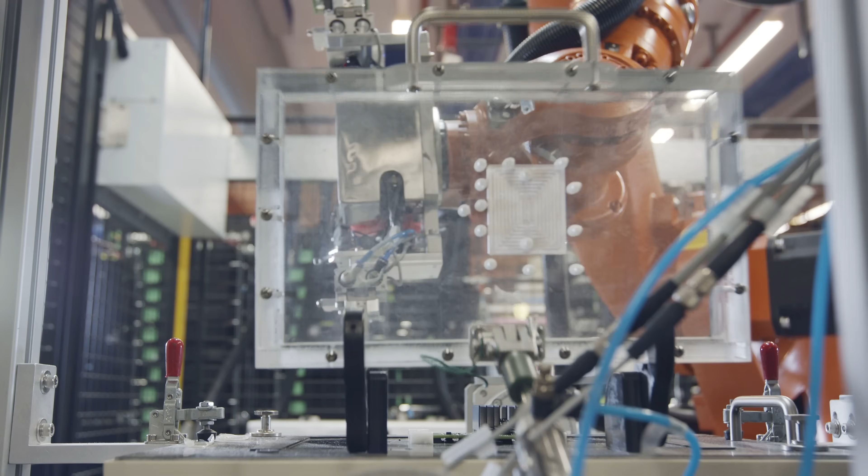Certainly we can add things to the robot to allow it to sense its environment. We can have force sensors in the gripper so that it knows how much it's squeezing, and we can set limits so that it doesn't squeeze beyond a certain point. We can add springs or any elastic components that allow it to give and be compliant if it needs to be compliant. We can add LiDAR so that it can map out the room and know a little bit more about where obstacles are, even if it doesn't know what the obstacle is.

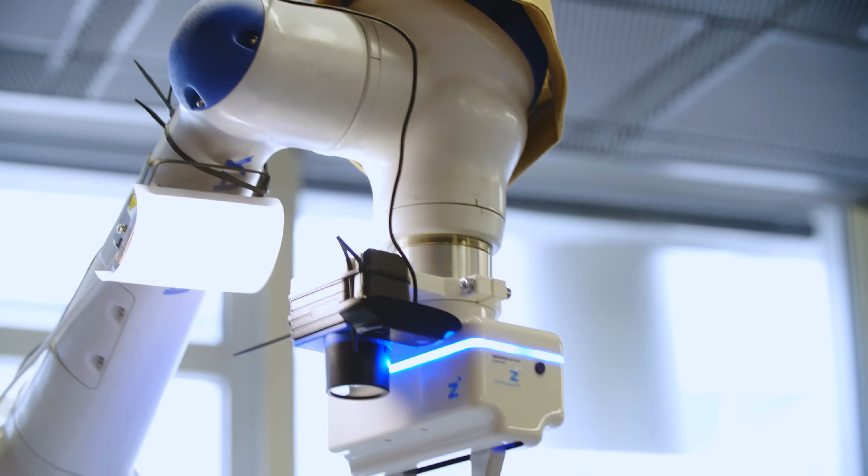Or we can add a camera so that it can use software to track objects if they're moving, or detect what an object is, or even detect the orientation of an object so that we can know what way to pick it up. All of these things add a huge amount of complexity and cost. They also give you more places for things to fail. Maybe it looks at a block and accidentally thinks it's a banana, or a sensor fails and it doesn't detect something that it should detect, and so on. So as you add more components, you are also adding complexity and cost.

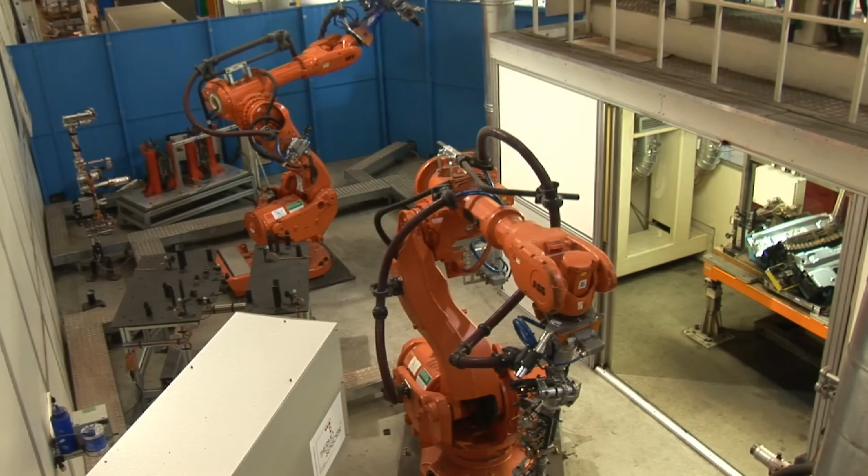Ideally, the simpler the task for the robot, the better. Although we can do much more advanced things with robots. So we need to figure out as much as we can in advance about the various conditions the robot will be operating in, and then we program all that into the robot at the beginning so that it can do its job over and over again. Generally speaking, the less variation there is, the better for robots, that is.

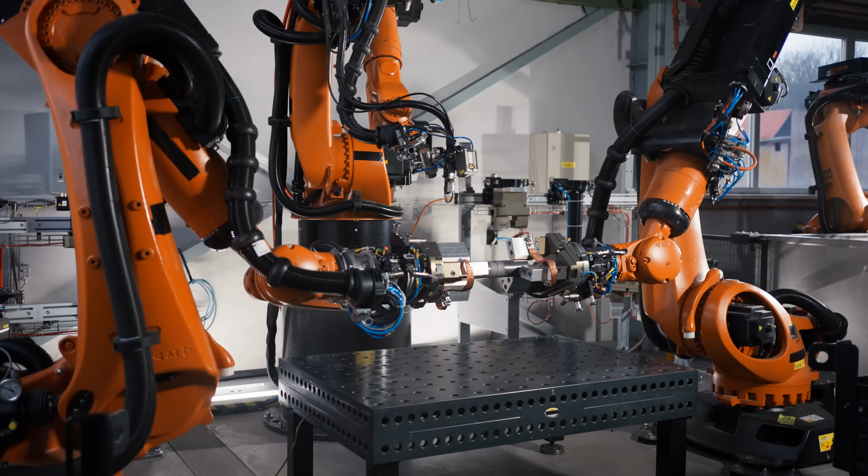Now, once you've mastered one robot and you've taught it how to do its individual job, now you need to teach that same robot how to cooperate with the robots around it. I mean, they need to be able to hand things to each other. They need to be able to wait for each other until the following robot finishes its task so that it can take on the next task, and so on. This thing scales into a really interesting snowball of complicated tasks that need to be done. Now that you've got that really basic introduction to robotics, we're gonna head into this lab where they prototype all sorts of industrial applications with 6 robots all collaborating together.

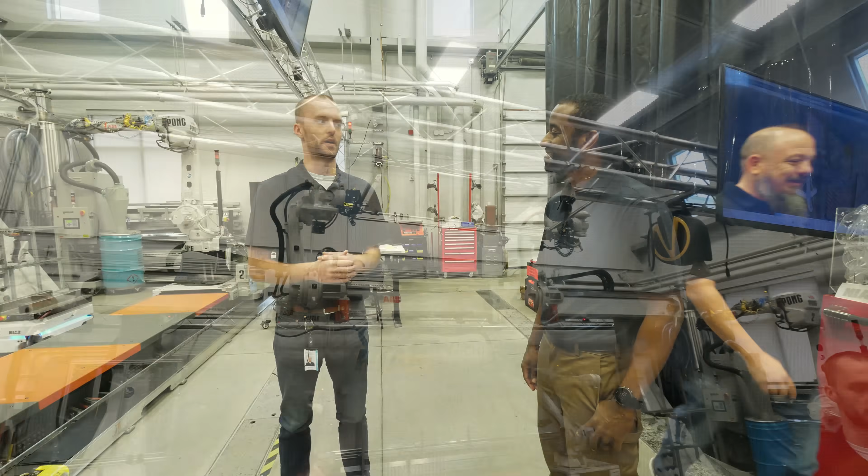This is the Robotics and Automation Lab here at WSU and NIAR. We roughly have around 15 full-time staff members and close to 35 to 40 students that work for us. And actually most of our workload is done by the students, and it's kind of overseen by engineers. I'm actually a business management degree myself, so I do a little bit more on the business side, but I help a lot of the engineers understand the business processes that go through the whole process of integrating a robotic cell into an industry.

Go ahead, if you want to click that button right behind you, actually I'll get it real quick.

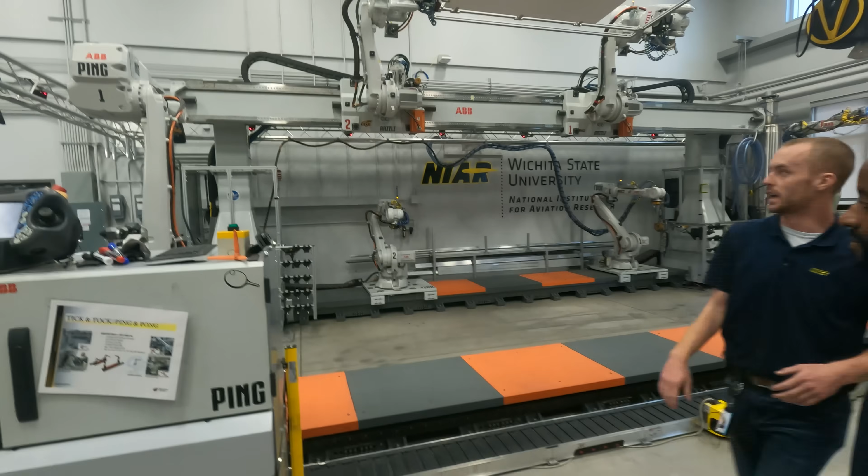And so this is what we call MRAM. It is our multi-robotic advanced manufacturing cell here at NIAR. A little bit of a mouthful, that's why we call it MRAM. But one of the things we do in this cell is a lot of prototyping and a lot of research and development purposes. This isn't something you would see at a customer site. They don't really need 6 robots on 3 different tracks that all share information with each other. But for us, it's really neat. So we're able to test a lot of different inner workings and be able to determine how things work together.

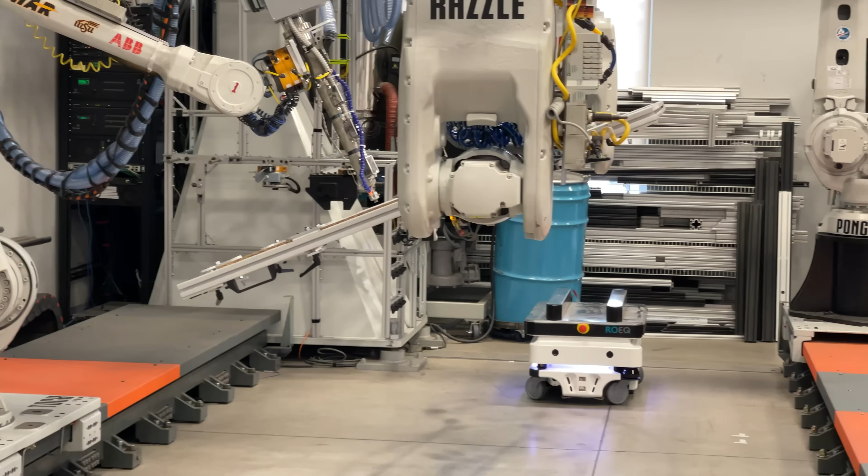We've actually been able to move panes of glass with these robots. Glass is very rigid. Any kind of different tension on different angles generally creates cracks, stresses, and things like that. These robots do it pretty smoothly without any issues, so it's kind of neat. This demo here actually would normally put a suction cup on this MDF board, and then we would, in a sense, run wire harness through it. Over here, we've even attached a large 3D print head, so we are able to do bigger print volumes than what a regular 3D printer would do. Yeah, that is giant, man. Yeah, it's very large.

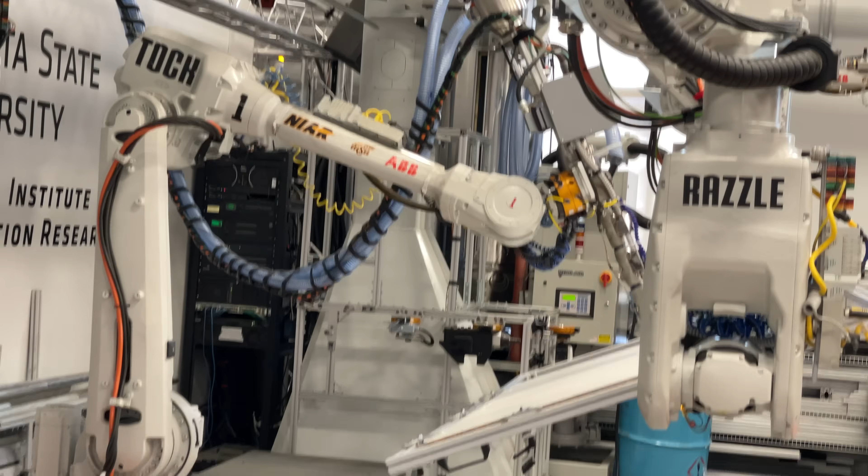It's not something we use very often, but it is one of those things that we like to highlight, the capabilities. Generally, if there is a product on the shelf, say like a drill, 3D printer, anything like that, what we do a lot of is we buy that product, we study it in some way, we disassemble it, and then we try to attach it to a robot. We've done everything from drilling to robotic inspection to pick and place.

Some of the more recent ones that we've been doing are pick and place, but with some more difficult materials to pick up, like bags of protein. Okay. Or we've actually picked up radiators more recently too. That's a little bit difficult because you can't really bend the radiator fins. So trying to pick them up in a specific way is kind of a fun, challenging little engineering process for us. It was funny because we had the radiators lined all the way across here, just big stacks of them. But yeah, we did this in this cell initially.

Okay, I want to talk about this radiator problem for just a minute because I love solving problems, and so when I hear a hard problem, I get really excited. Now, of course, we don't know all the conditions, and if we could figure this out in a few minutes, we wouldn't be doing this in a research lab, right? So we need to pick our radiator up. There's a couple things. First, we want to make sure it's positioned in such a way that the robot can grab it the same way every time.

Also, we can't just use a regular gripper because if you squeeze it too hard, you're definitely gonna bend those fins. They're so fragile, so easy to damage. Certainly we don't want this to happen before it comes out of the box, right? We want the customer to receive a radiator in pristine condition. So how do we get that? If you don't squeeze it hard enough, it's gonna slide out of your gripper. You can't use vacuum or suction because the fins allow air to get in and you're never gonna be able to pull a vacuum.

And that's why research facilities like this exist, because they can see what happens if you add a feedback loop, something that's measuring how much force is being applied. Maybe you can get it dialed in just right to lift it perfectly every time. Maybe you need an entirely custom-made gripper that works well in all the different scenarios, or you need a combination of the two where you've got feedback and a custom gripper. Solving these kinds of problems is huge for mass production, right? If you want a robot to be able to work 24 hours a day and pick it up consistently, correctly, without damaging your product over and over again, you need to solve these kinds of problems. And that's what I love about what they're doing here.

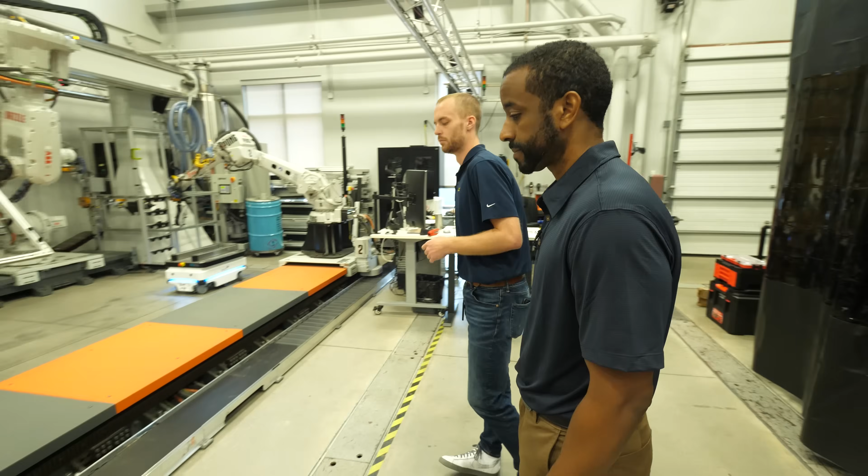Generally what happens is we will purchase all the parts for the customer. We'll get everything in, the robots, if we need fencing, especially in industry, industrial robots generally need to be safer, so fenced in is one of the big things. For us in the prototyping world, we use LiDAR scanners and these sensors. So as I get closer, I'll eventually stop the robot. Yeah. So much easier for us to enter and exit the cell without having fences, lockout, tag out.

I'd like to talk a little bit more about your proximity sensors and safety devices. Is this a sufficient option for going industrial without caging? Can you talk a little bit more about how this system works, what its limitations are, things like that? Yeah. So I would not say that this in itself is sufficient enough, especially in a production environment. Okay. If you're doing research and development, you're getting to where it could be more sufficient. We like to use these along with something called light gates.

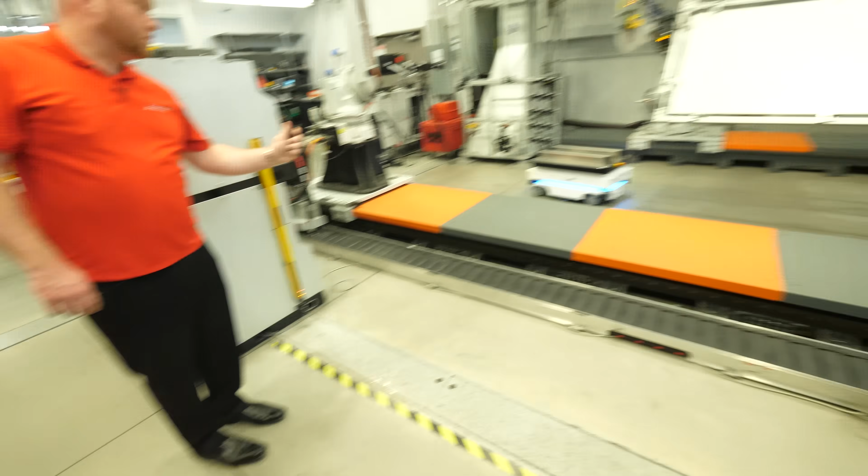Okay, I didn't see the light gate there. Actually, that one's turned off because we have this one on and we enter and exit the cell. We like to really highlight how this works. And where's the other end of that? Okay, I see it over there. It's on the fence right there. That actually helps us use a faux wall. So we use those a lot, but one of the things it doesn't really tell you is if there's something already in the cell when the cell starts. But lockout, tag out, we've done in the past. A light gate is very much like those sensors that most people disable in their garage.

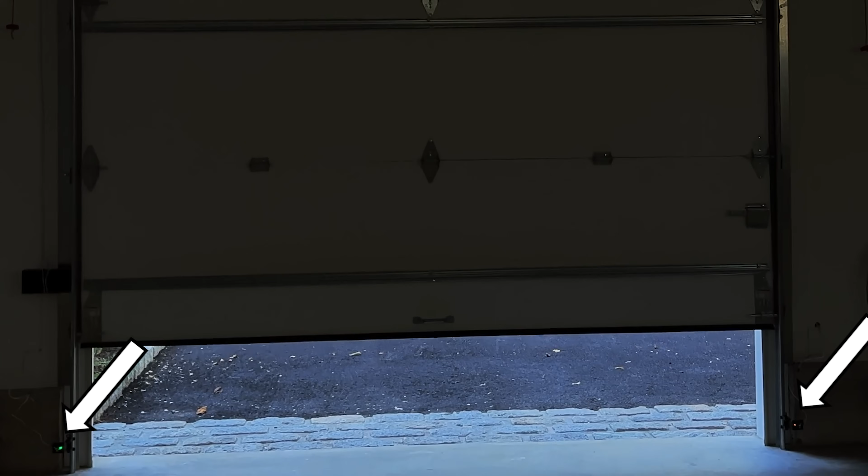When you walk into your garage, you break the beam and the garage door stops, except this is a whole column, so you can't just step over it. Anybody passing through this light gate will trigger the system, which should make all of the robots stop moving as you come into the cell. But as he mentioned, once you're on the other side of the light gate, the beams are continuous again. So then you would go to a more robust system like lockout, tag out, which is what he was describing.

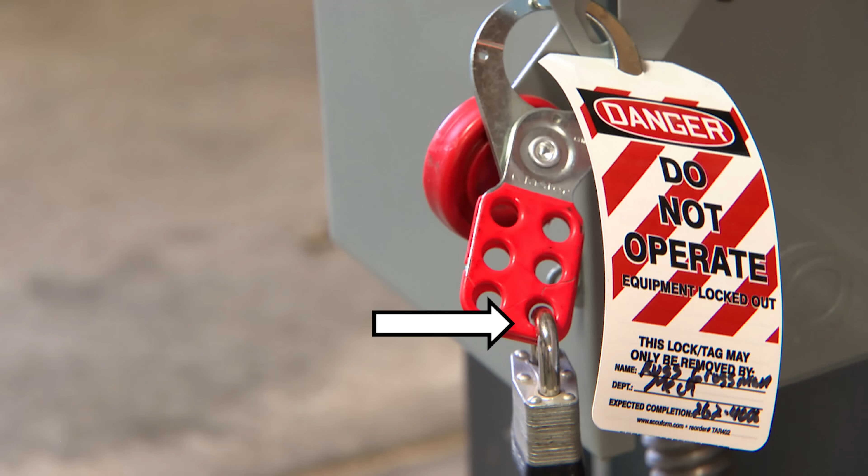And all that means is the physical switch that allows the machine to be turned on is in the off position and locked in the off position. So there'll be a tag here that says, don't turn this machine back on, and it'll be physically locked. The person who's working inside the cell will have to come out, and then they're the ones who are supposed to remove the lock. That's the way it should happen, thus making the system much safer for humans to work around.

We work with a lot of industrial robots. Some of the other types of robots are this MiR over here, the autonomous mobile robot. We use these a lot for ever-changing environments. Generally, they're a little bit different than what you would see at your regular Amazon packing facility, where they follow tape on the floor, reflectors on the ceiling, or anything of that nature. These use the same LiDAR sensors that are actually in these sensors here to map their environment and then path based on that mapping.

Generally at manufacturing plants or something like that, they have a walkway for people and potentially a walkway for robots, if they have mobile robots. These don't necessarily need that. They're able to move around that map they've created and path through different objects. If you have people that are bringing pallets of parts in, they're able to actually move around that and not be held up by anything. So pretty neat situation there.

So one of the big things is safety, especially in robotics. These industrial robots are meant to do a job and be very repeatable and not be stopped even if you enter or exit the cell. They're going to go right through you. Luckily, that has never happened here. We were very safe. But one of the things is that customers will come to us and be like, hey, this is something that we need an operator in that cell to work on. Generally, we will advise them not to use an industrial robot if that is the case, because safety.

So what robots we then advise to use is collaborative robots. A lot of the collaborative robots actually have force sensors built into all their joints. So if they swing around real quickly and they bump into you, it may hurt, but it's not going to go right through you like an industrial robot will. It'll actually stop based on that force sensor. You're then able to start it up later.

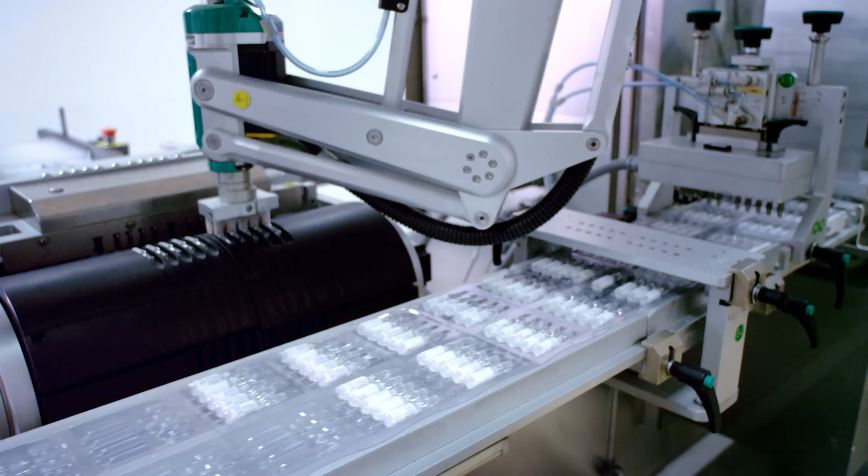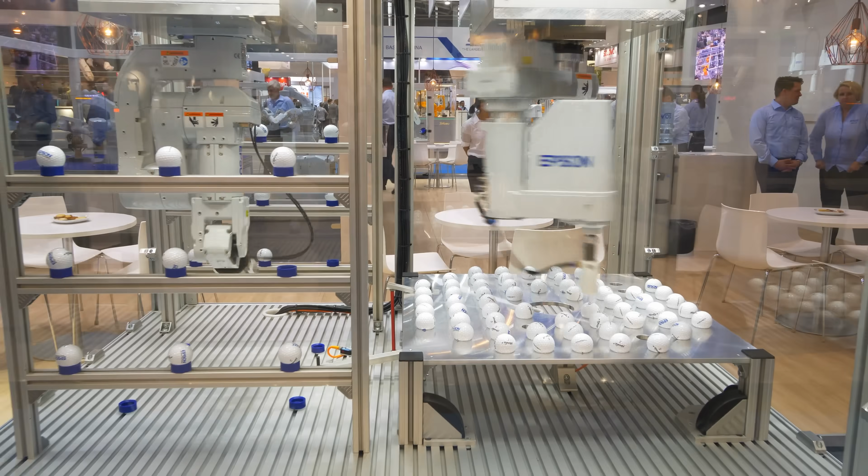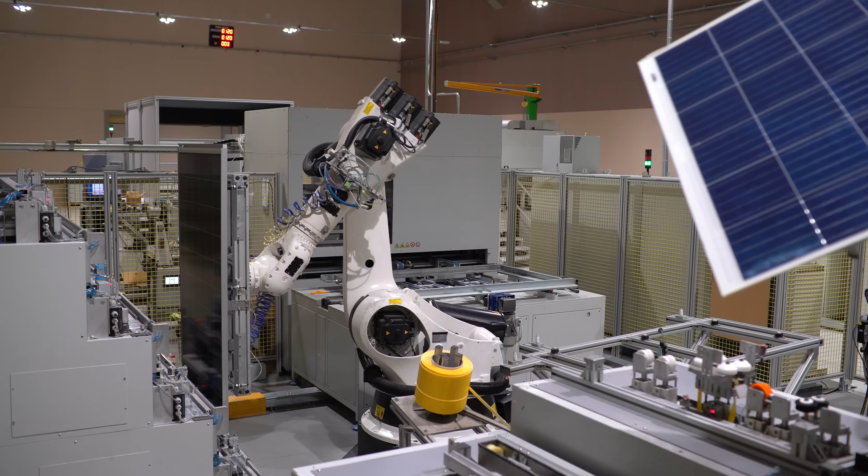If you want to move 1,000 parts an hour, you can make a robot move 1,000 parts an hour, but that robot moves so fast. If you have a human in the way, it cannot stop in time to prevent injuring the human. And if you want a robot strong enough to lift a car over and over again, any force sensors or any compliance that you add to that robot have to be robust enough to not be triggered by the car itself, which means that a human, when it gets in the way of that robot, is never going to trigger that sensor. And so there's always a trade-off. You have to give up something.

Generally, you are giving up both speed and power or lifting capacity when you switch to a collaborative robot, among other things. But that's why you might go industrial versus collaborative.

And that's how we come back to what he said in the interview, which is if they really want to have a human working next to this robot, then we're going to have to switch over to collaborative. But what he didn't say is when you switch to collaborative, you are usually significantly lowering the capacity of the robot to go fast, as well as how much load the robot can handle.

Now, at this stage of the interview, we found out we were actually supposed to be meeting with the SAE team at this time. We got our times mixed up. So we left this room and came back and continued to interview with another person. So we're going to pick up with Matt Tomlin as we talk more about this robotic cell.

So my name is Matt Tomlin. I am the director of ARC, which stands for Automation Research Center here at NIAR. And what this lab is, really the best way I like to think about it is as industrial R&D. Meaning I can take anything from that reverse engineering side, all the way up from a napkin sketch, up to a production level machine that operates at 3 shifts a day, almost lights out.

Yeah. The cell behind me called MRAM, Multi-Robotic Advanced Manufacturing Cell, is designed to be able to take any tool that I would like to see on a robot or see in an automated cell, and I can put it on any of these robots behind me and be able to simulate an environment as close as possible to what one of their full cells would look like.

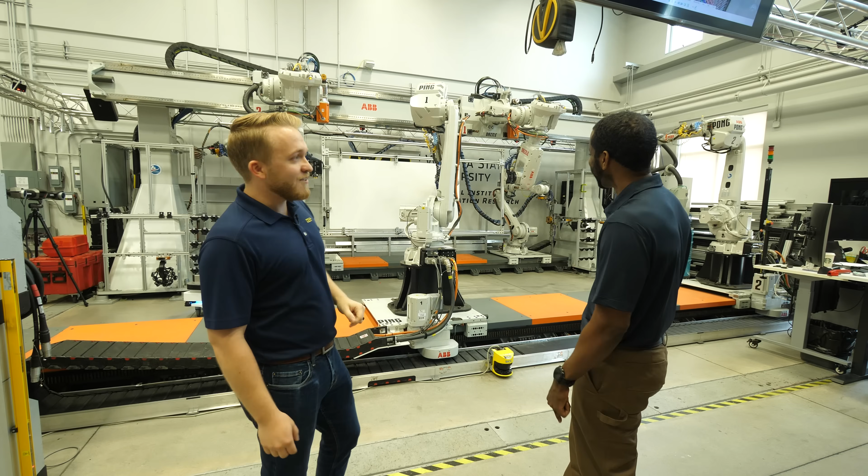Okay. Right now they do it on tables, they do it on maybe 45-degree stands or sometimes boards that sit at about 90 degrees. Yep. Here for me, I mounted it on 2 robots that are hanging off the rail on the top, right? Yeah. It's so overkill. But what it allows me to do is I can rapidly build that in-house in about a day. I can stick it on the robot and then I can tell you what it's going to lay up like at a 90 degree, at a 45 degree, at a 0 degree. So you can see all sorts of different variations.

But having it on those 2 robots allows me to be super flexible with it. And especially when I build a tool that does the wire laying, I can see how it operates at different reachabilities for the robot to see if we have accuracy issues. But areas or examples like that are the reason that we use the more complex cell, even though it might be a little bit overkill.

Now, I thought this was really interesting because normally in a production environment, you wouldn't use 6 robots because you could just build fixtures for the things that aren't moving around and the robot can just interact with the fixture. That would be significantly more cost efficient and again, reduce the number of parts that are wearing out, and so on. But in their case, they're rapidly changing the scenarios all the time.

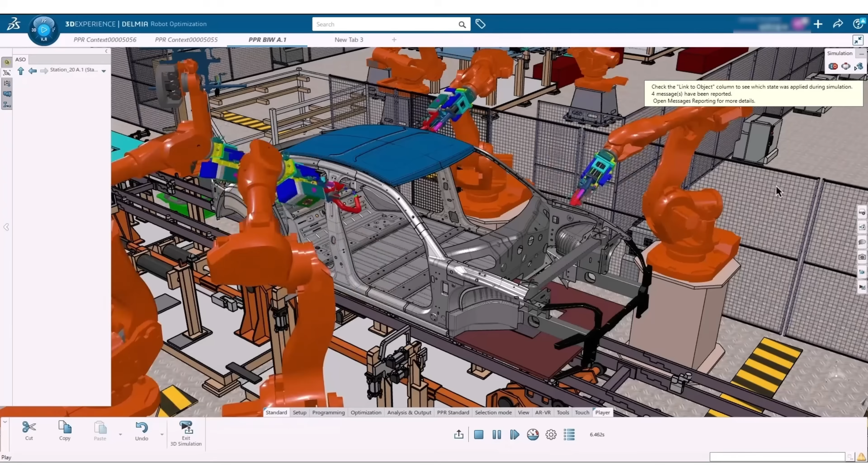And so they're using Delmia to quickly program the robots to get whatever the temporary fixture is into the right spot, and then they can interact with that. And if they don't like the position, they can quickly change the position of the fixture from 90 degrees to 45 to flat, as the example that he gave. That's phenomenal, I agree. It's overkill in a production environment, but it makes perfect sense in an environment where you want to rapidly test out multiple ideas.

You can set it up very quickly, as he described, within a day in Delmia, and then you come over to your robotic cell and actually do it for real with real robots. Now you've confirmed your results from Delmia in the real world, and then you can go about building fixtures to do this type of setup in a production environment.

When you say wire laying, we're talking about you might have a panel that's got, I don't know, 50 or 100 or 300 wires on it, and then the robot will pull the wire out. What happens? Is it also stripping the wires as well? Actually, so let's take a look at the tool right back here.

So this is one of our very quick prototype tools, right? At the very initial stage, to even test the concept. Is the concept even going to work? So we built this literally in the matter of a couple of weeks. Had the idea, designed it all in 3D, in a 3D environment, so specifically for us, 3DE. When it came down to it, we designed all the different pieces here.

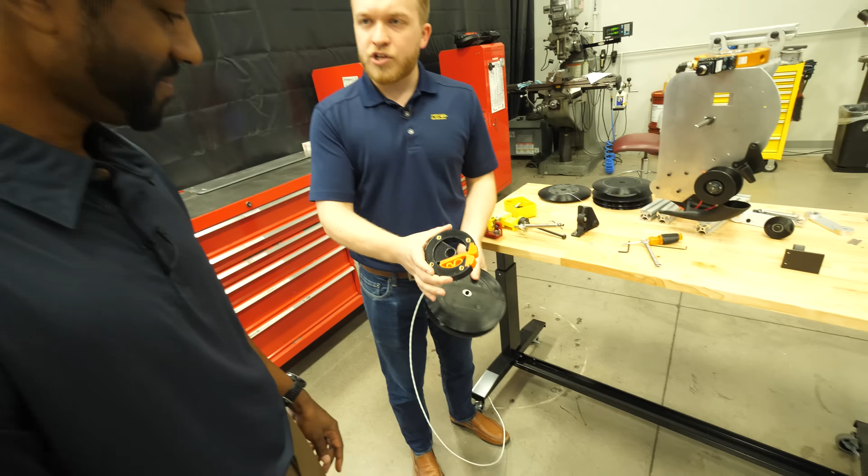So like the spool would be one of them. Yeah. So I'd have a spool of wire. And the way this works is on the inside of the spool, I have this little, almost like a holder, if you will. And the way this is designed is so that I can take a piece of machinery, which is just over here, that actually cuts, strips, and labels all of my wire.

I can shove it directly into the spool, but as it's pushed in, it holds it while it's in the spool, but as soon as it needs to come out, the tension's built just right to where it just pulls straight out of the spool and goes directly onto the board, allowing the robot to come back over, shove the wire in, and then start spinning this to spool up whatever it needs to spool. So that part is fully automated then? It is fully automated, which again is the concept that they were really going for here.

But now, as we look at getting production level ready machines, the big part of this is I can only do one wire at a time. And when I'm talking wire harness boards, I'm talking a lot per hour, per day. They need numbers at the end of the day. And so what can I do to speed this up? It's actually where we're looking at, like, AFP machines are a great example. So that's automated fiber placement machines.

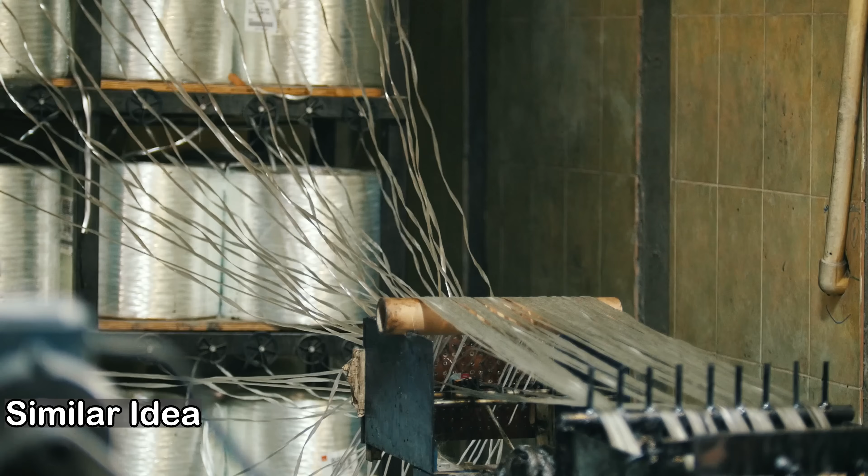They have a lot of technology out there that takes tows of these composite fibers. And by tows, I mean just like simple spools. There's 8 spools on one head usually, or maybe you can get up to 16. And they all flow through the center and actually come out to where they are laying up and making a tool. That's actually how a lot of aircraft are made now.

Wow. But can I take that same idea now and introduce it for our wire harness tool? To where now I feed in 8 different wires, or maybe 16 different wires, have it all feed through the end of the tool and then lay it directly up onto the board. That's where we're talking numbers and sheer speed coming out of the cell, to where I'm producing maybe a full harness in an hour.

And that's what I love about engineering, because you're constantly thinking about new ways to solve a problem. And when we first walked over here, in my mind, I was thinking, all right, so you have the quick change tool on the top, and this could be set up for one wire, and then you'd have another one, and then another one. But if you could spool all the wires in advance together and then take the whole thing and put it in, that's unbelievable.

And that's what's nice too about working with so many different industries, is we use some aerospace and defense tech to be able to actually translate that concept out to other industries like automotive, for example. And so we get to bring a whole new light and whole new eyes to industries that haven't seen it before. Yeah, that's fantastic. So yeah, absolutely everything we do goes through a couple different design phases.

So I have my concept design, I have my detailed design, and I have my final design phase. And that's all before I ever even build a full cell. But what I can do, and what we do here in the lab, is design all this stuff inside 3DE, whether it's part design, assembly design, whatever it might be.

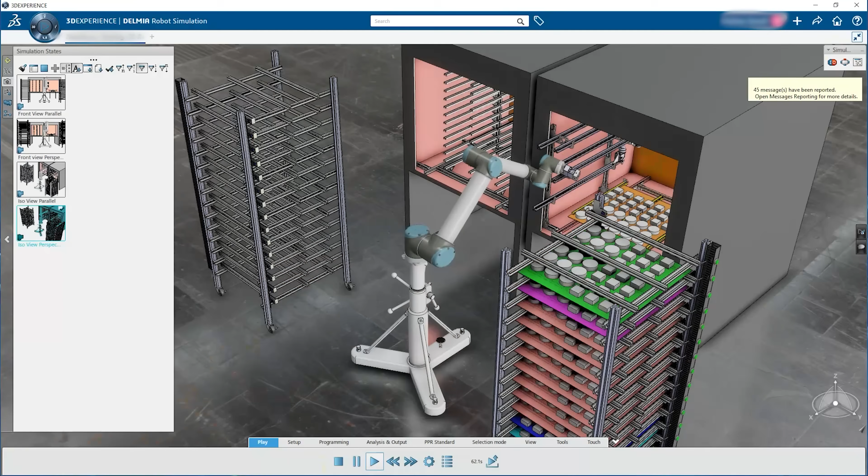I go through all my kinematic simulations just on a base level, like if my spool needs to rotate here, something needs to open and close, great. But then I can take those kinematic models and I can translate them straight onto the robot using DELMIA. And that's a lot of what you see up here on the screen, is we've developed these individual tools.

And so yes, you can see it picking and placing. Yes, you see some dry racks, you might see some other bits of automation, but the robot's also sitting there driving absolutely everything. So as I pick up and drop, I can see what that looks like. I can see how much time it takes. And so then I can actually start to produce some metrics.

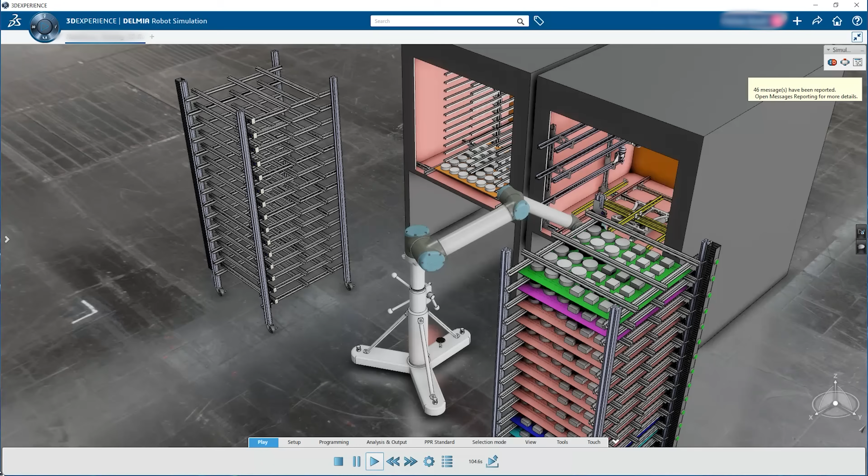And so we get into those design phases. I don't necessarily just have a design, but I have full-on metrics that have been simulated that I'm shooting for when I build the overall cell. It's also a great tool for doing our internal designs. So I guess our internal studies that maybe the customer might not care about, like reachability, for instance. When I set a robot on a stand, is it gonna be able to reach everything that I need to?

I mean, the customer just cares that the job gets done and that it does what it needs to do, right? But when we're designing, reachability is a huge deal for us, because as I put on each individual tool, that reachability is going to drastically change. And so being able to automatically simulate it for various different tools and see different scenarios is always a huge benefit in our specific design process that we go through.

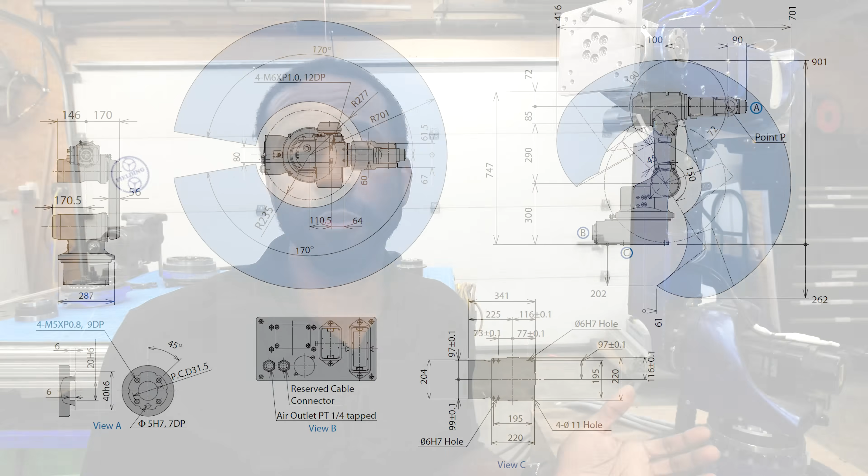Reachability is one of those things that's really easy to understand, but very easy to underestimate. Essentially, it's, can the robot get the tool into the right position and the right orientation? Now, every robot comes with a working envelope. It's usually a diagram that shows you all the areas that the robot can reach. But when you put a tool on the end of the robot, that can significantly change the reachability of the robot.

In fact, even when you put a tool on a human hand, it can change the reachability of the human, right? If I've got a tiny wrench, I might be able to reach into a tiny little space and be able to work the tool around. But if I need a bigger wrench, then my reachability is going to be significantly different. Not just that I can get the tool into the right orientation, this is already going to require me to be able to move my arm a much bigger range, but also clearance. When I go to pull this tool out, can I pull this tool out without hitting anything?

Can you get the robot into all the orientations where it can do the job completely? That is, get it in the position and out of position so that it can do the job and not destroy anything else in the environment. So let me give you a quick example. Here we've got just a screw mounted on the end of the robot. Let's pretend that this is a drilling operation, and then assume after that we suddenly need a longer drill, and you can see the difference.

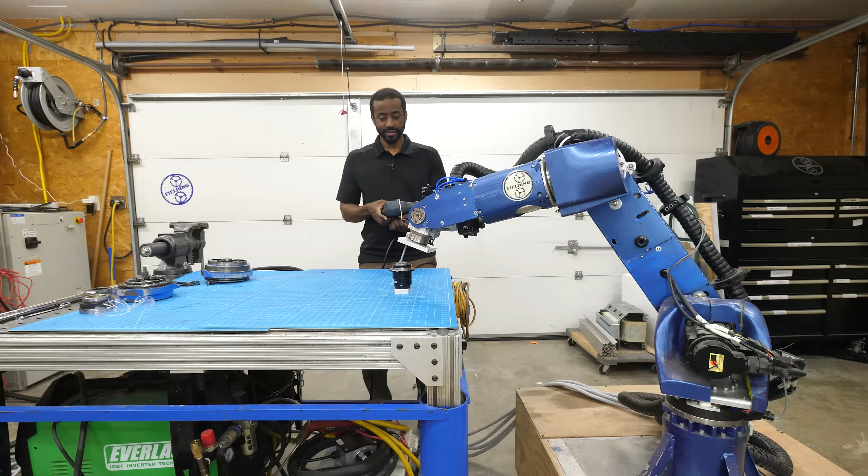All right, that's pretty close for demonstration purposes. So let's just assume that we've got everything lined up. Let's say we need to drill a bigger hole, and all of a sudden I need a much bigger tool. Well, the problem is now the robot needs to be much further away, right? And there you go. I'm hitting one of the hard limits on one of my axes. It's probably this one. Yes. So that one is not going to rotate down anymore in this position.

All right, you can be quiet now.

Even from my example before, it looks like the robot should have been able to reach that position, but it was just barely out of position enough that I couldn't quite get there. And that's super easy to resolve. It just means the stand needs to be a tiny bit higher, or this needs to be a little bit closer. If all of this was up just another inch or so, the robot could point a little more down. Like, there's all kinds of little tiny changes that would get everything back into scope again. But I would only call those tiny changes if we're in the digital environment.

After you have welded and machined and made all of your parts and got cranes and moved all your stuff into place, you are talking about so many hours of labor invested only to find that you're off by that much. And I really just wanted to emphasize how advantageous it is to be able to simulate those situations in advance when the cost is very small, compared to building it by trial and error just to see that you're just a tiny bit off.

It was around this part of the interview that we had a bit of a camera malfunction.

So just before the camera came back on, we were discussing robotic paint applications. And he was telling us about some of the challenges with robots doing paint in aircraft. But paint deposition was massive for them because it's aerospace. And so that means if I just get a little bit too much of an overlap, like instead of a 1/4 inch overlap, I have a 1/2 inch overlap, that whole part can't go on the aircraft because it doesn't meet the certification process.